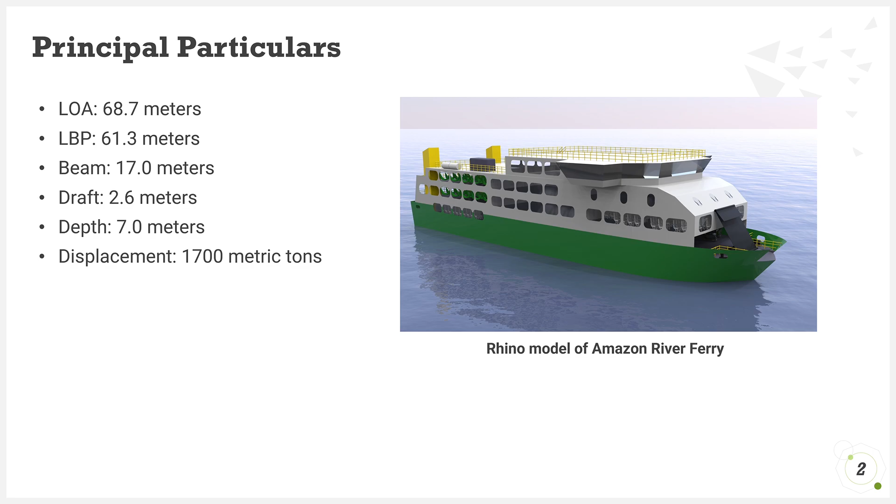Values of particular significance are the length between perpendiculars of 61.3 meters, the beam of 17 meters, and the draft of 2.6 meters. The particular that drove our design most heavily was the draft. This vessel's draft meets the Port of Tefe's shallow depth of 3.5 meters with a clearance of 0.9 meters.

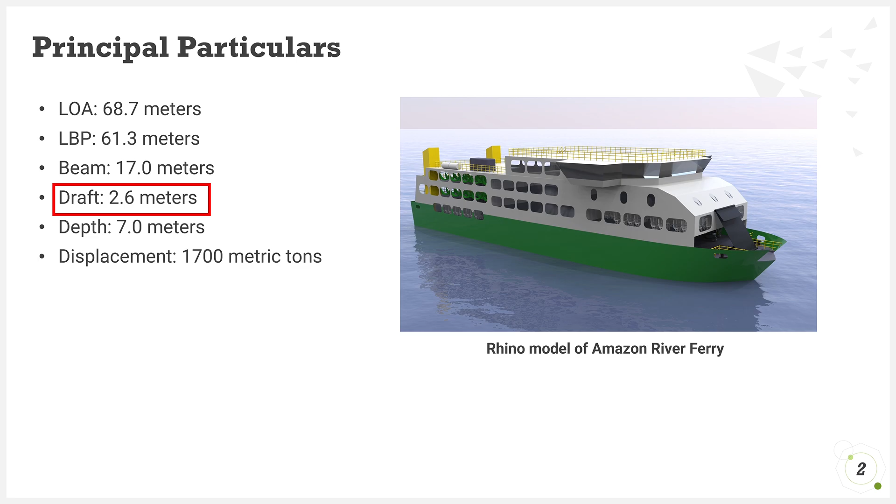I'm now going to walk through the general arrangement of the vessel. I'll first explain key features using the inboard profile, and then I will quickly show the decks in plan view to describe the flow of each of the spaces. To begin, I'll discuss the passenger accommodations. The passenger hammocks are located aft on the O1 and O2 decks. When traveling at 18 knots, we thought it wise to place the open hammock deck aft rather than forward to maximize comfort.

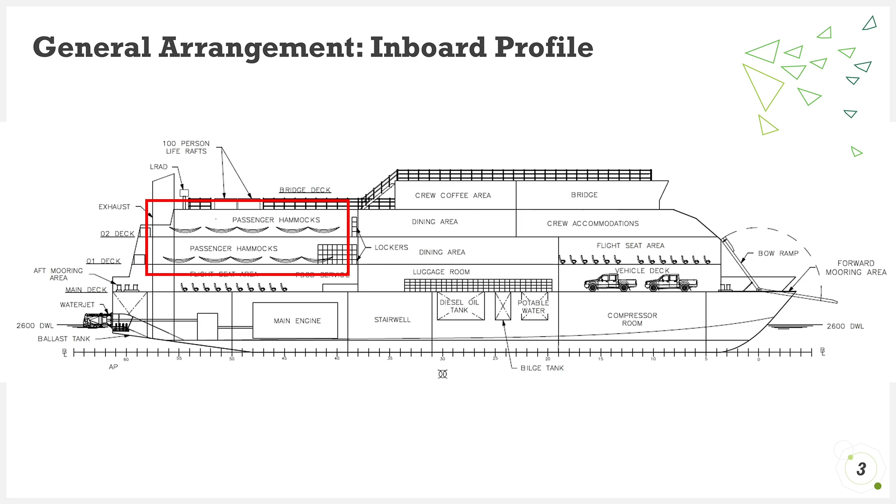Next, flight seating areas are located forward on the O1 deck and aft on main deck. It's important to note that this vessel does not have an elevator, and so it was important that all essential passenger accommodations are accessible on main deck to ensure accessibility for passengers with disabilities that may prevent them from going upstairs. This includes the food service area, as well as passenger heads and ample space for wheelchair access.

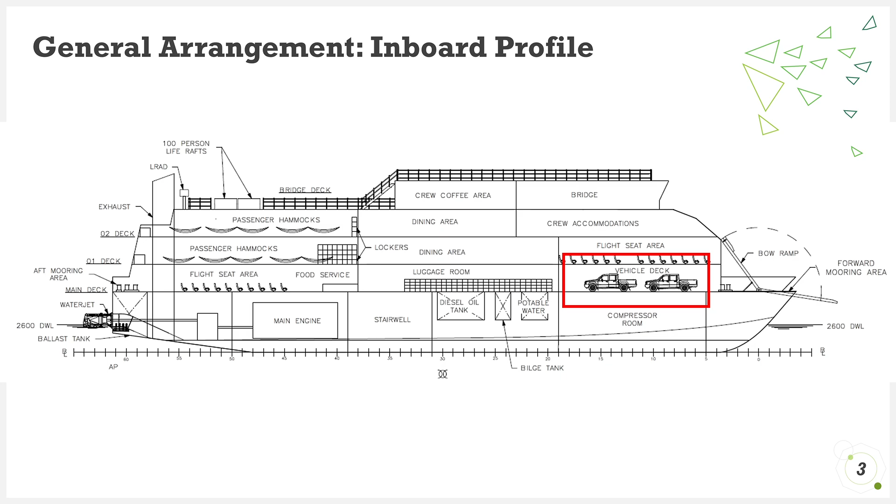Airline seating will have built-in fold-down trays for dining, and each of the upper decks contain picnic tables for hammock passengers. The luggage room is also located on main deck and is sized to fit 2 large suitcases per passenger. Storage for personal items is located overhead for flight seating and in nearby lockers for passengers in hammocks. The vehicle deck, which houses the 9 small freight trucks, is located forward on main deck. Finally, the propulsion system, which is water jets, can be seen here in the aft portion of the engine room.

In this plan view, we can see the layout of the main deck. Both passengers and vehicles will load and unload on the bow ramp. The bow ramp is sized to allow for a single lane of vehicles and 2 lanes of passengers. It is important to note that when unloading, vehicles will be backed off the ramp. Because there are so few vehicles, it is assumed that this can be done safely and efficiently.

Once passengers are loaded via the bow ramp, they have 2 options to enter the passenger spaces. They may go to the port side lane and back through a passageway to either the aft flight seating area or up the stairwell to upper decks. Or they may go to the starboard side and pass through the luggage room to drop off luggage before entering passenger spaces. There is also one 100-person life raft located aft.

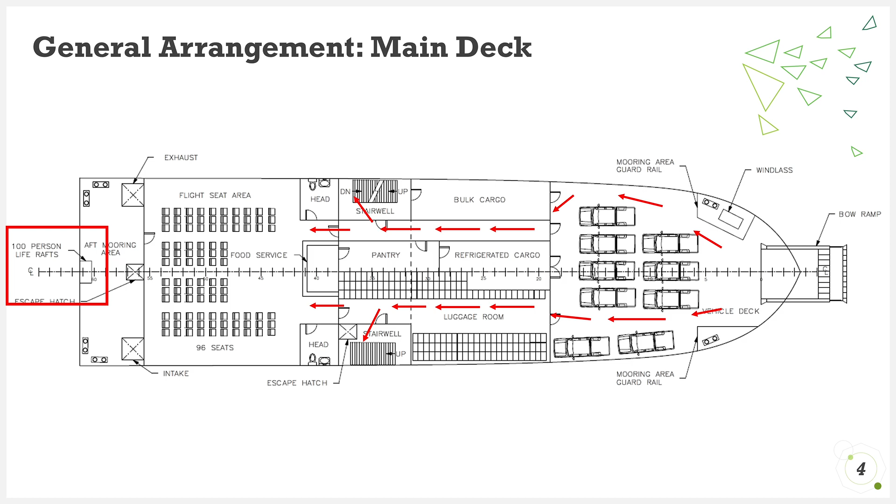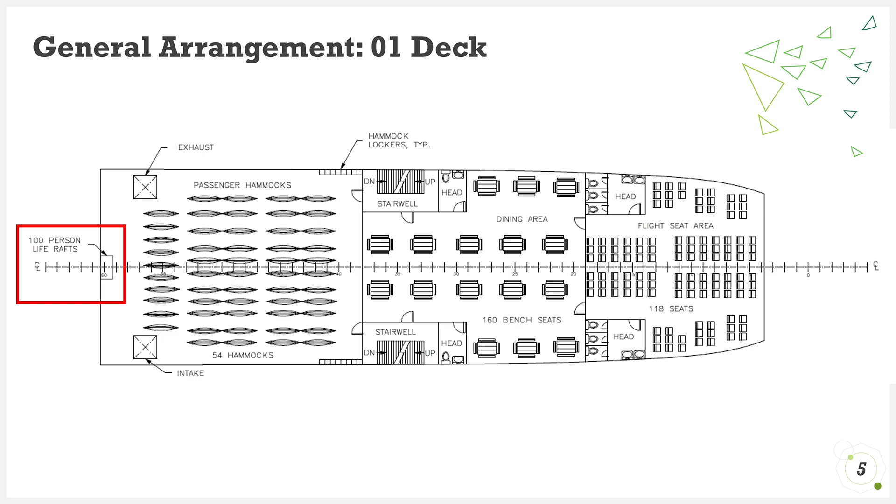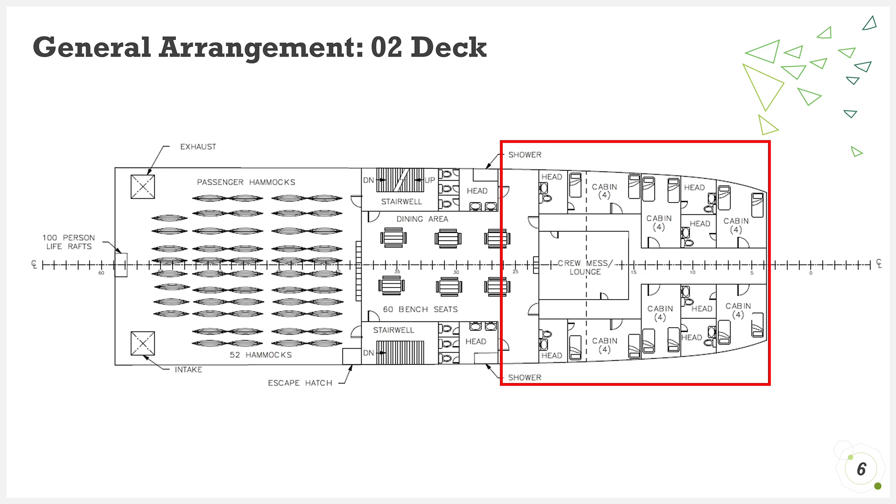I won't dwell long on this slide. You can see the layout of the hammock deck, dining area, and flight seating mentioned previously. And again, there is one 100-person life raft. This deck is much the same as the O1 deck, with the exception that the forward end of this deck is designated for crew accommodations for the chosen crew capacity of 24. The 6 cabins each contain 2 sets of bunked beds. A crew lounge is located in the center of the space for dining and general relaxation, and there is another 100-person life raft.

Another important design aspect of this vessel is the safety on the bridge. As is standard safe practice, 360-degree bridge visibility is necessary. To meet this, the vessel has bridge wings on port and starboard, as well as an open deck aft of the wheelhouse for additional viewing. In terms of piracy protection, the vessel is also equipped with 2 long-range acoustic devices, or LRADs, which provide a targeted method of deterring pirates attempting to board the vessel.

In terms of life-saving, the vessel is equipped with 4 100-person life rafts in addition to the 3 life rafts located on each of the passenger decks. These are located aft the bridge and will be deployed by the crew in the case of an emergency. The vessel's emergency diesel generator is also located aft the wheelhouse and can be easily accessed when necessary.

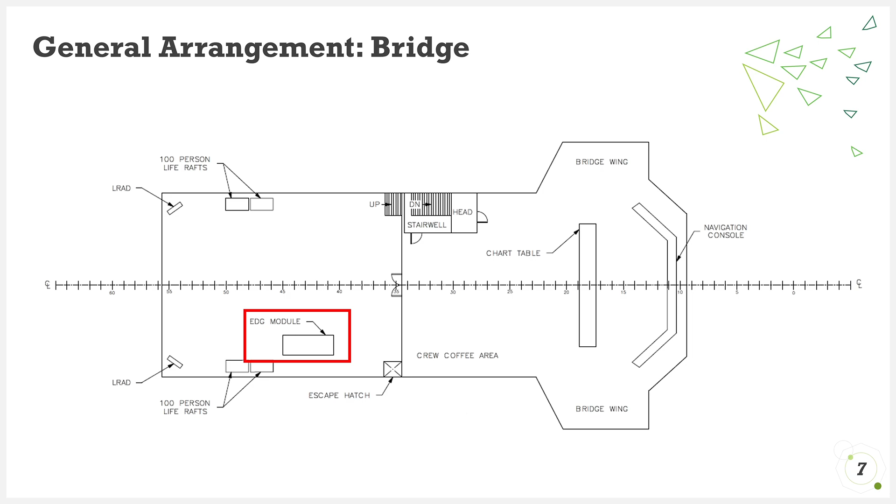Thank you for listening to this brief overview. More information on the design process can be found in our design report.